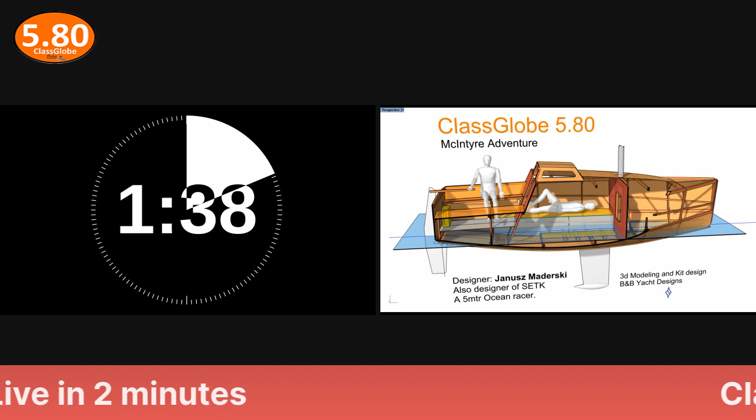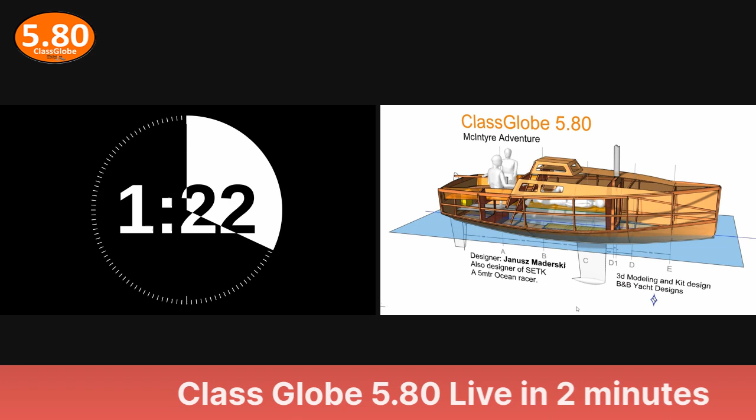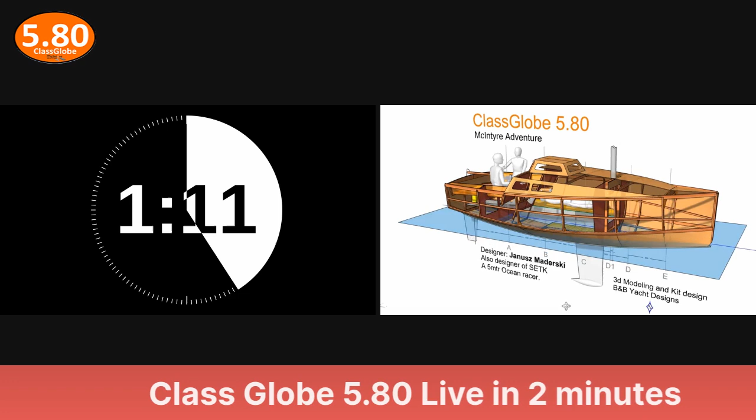This is Alan Stewart with B&B Yacht Designs, and I've got a sneak peek of a new 3D model. This is the Class Globe 580, designed by Janusz Maderski for Don McIntyre, who's putting together a new class called the Class Globe 580. And we are excited to be working on this project with him.

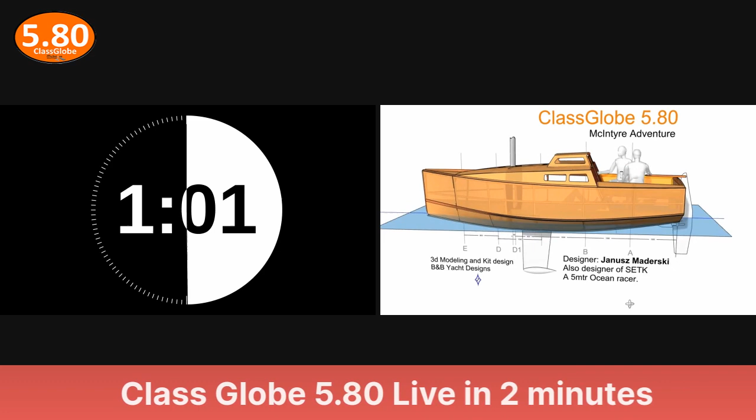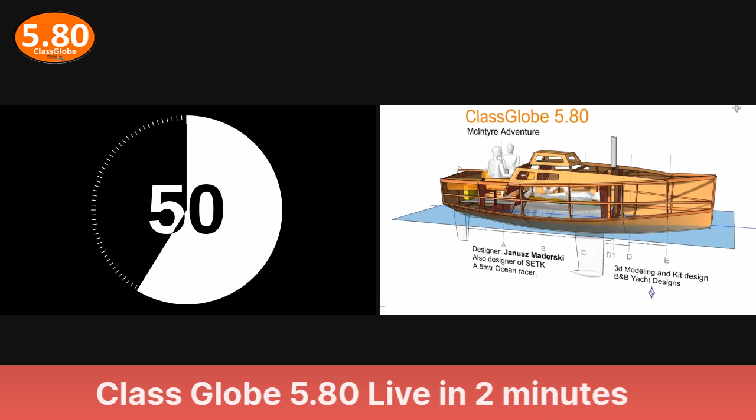This is the 3D model that we've been working on for the boat, and we're going to be putting together a kit for this boat. And more information is going to be available on their website, classglobe580.com, where you can see where to purchase the kit and you can read more about this boat. But we're really excited about the design and excited to be working on this project.

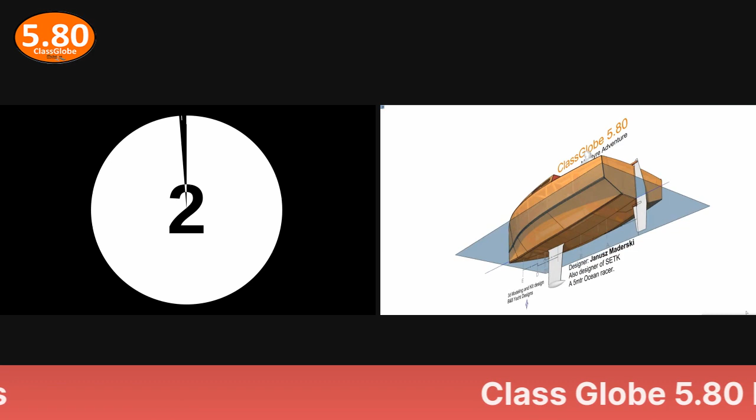Well, g'day everybody. It's been a while since we've had an update, and I'm in Les Sables d'Olonne at the moment with the Vendée Globe happening just out the door there, and Jane is on the side in Adelaide, South Australia. I've got Aida here as well, helping me back up in case I lose the internet.

And Jane's laughing like crazy. She just sent me a message. Just as we're about to go to air, I used the wrong logo. So we definitely are Class Globe 580, not Class Mini, which I put up there.

So anyway, this is going to be a bit of a monologue, me talking for however long it takes. We're going to go through a lot of things, things about the boats, about the events, and about the way we're managing some of the stuff, and so on. So yeah, sit back and have a listen to this.

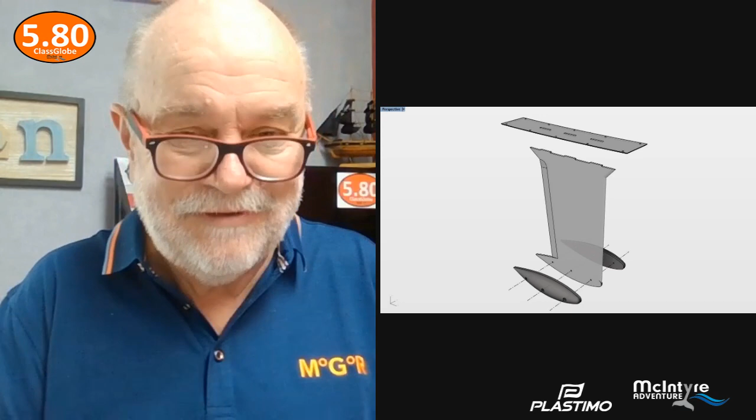There it is. Okay. When you buy your stainless steel pack, which is a rudder, gudgeons, pintles, all that stuff, you get the file to cut the steel plate into the format where you have tabs going up into the base plate, and then you have the lead bulb. Our keel in Poland looks like it's not running as fast as we thought. It's still not manufactured. I was trying to get an update from Piotr, but he's flat stick doing Trekka for us. And basically what we know is that the weight of the cut plate is correct, and we're yet to cast the bulbs.

We're suggesting and advising strongly that everyone that's doing a bulb, don't cast it yet. You can make the plug if you want to, because we made the same plug for ours, but it'll probably be heavier. The bulb will be heavier than what's designed, and we want to sail Trekka with a heavier bulb just where we start, because it's very easy to shave the lead off the back. So I'll let you know what's happening there. But yeah, you can go ahead and build your keel, but don't do your bulbs yet. Just remember that. That's very, very important for now. Now, the stainless steel pack, I'll just drop a couple of these in. All right. They're all under manufacture now.

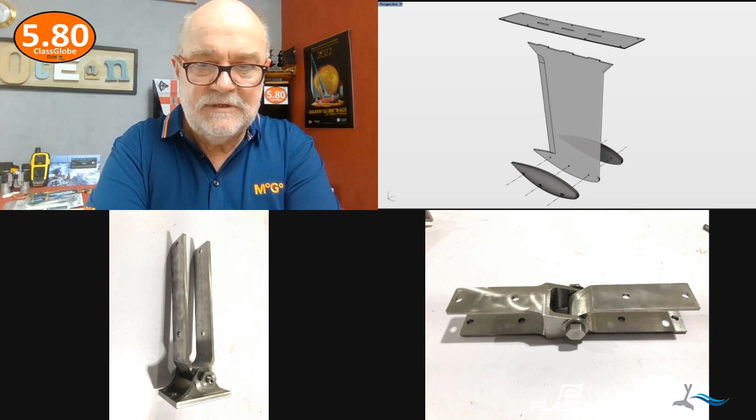We're doing the first 50 sets. Some people didn't take on those sets. They're all set there, ready to go, but those that have got them, we're scheduling to have them finished at the end of this month, and we haven't been advised of any other issues, so it should be on track. Then we'll get them out. Okay. So stand by for that. That's pretty straightforward. They're going quite well.

When we do get them, those that have ordered them now will be getting one of these. In fact, you'll get two. We've done the numbers, and you'll actually get two Globe 580 hats, with Mini Globe Race on the back and all the rest of it. So when you get your pack, look out for a surprise. There'll be two hats in each one of the kits, because the freight is really heavy, so we can easily put light stuff in, and we thought those that bought now get some hats as well. So there's nothing more I need to tell you on that.

One thing we thought: the bolt that goes through the gudgeons and pintles that you can see here is specially manufactured. It's not an off-the-shelf bolt. It's actually turned down to fit in and pivot. And someone may want to carry a spare bolt. I don't know. Will I carry a spare bolt? Probably not. If I was doing the Mini Globe Race, I may, but we'll see. That's about the only thing there. So I'll get rid of those now. That's all going pretty well. Come across to the next one.

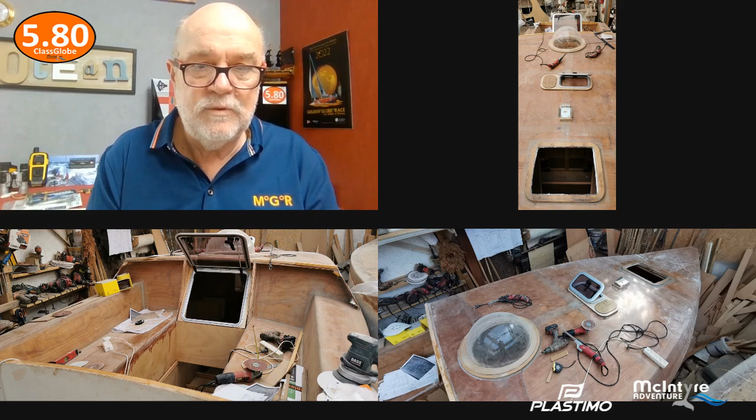If I knock in some of these, this is all about the Plastimo Builders Pack. Pitor's frantically about to start fitting all our Plastimo stuff. Trekker's currently white with 4 layers of beautiful white, and another 580 builder went and saw it and was completely gobsmacked when he saw the boat. He's a lucky guy. I haven't even seen the boat, but the camera's wide-angle lenses distort the boat, and you can't sit back and see it.

Anyway, this guy went to see him. He talked to me about wanting to build a boat, and he just signed a deal with Pitor to build the next one after Trekker. So apparently it looks really hot. So we're waiting with bated breath on that to see more.

So the Plastimo Builders Pack, I keep saying this, it's only a few weeks away, and it is. It's still only a few weeks away, but we'll try and get it sorted as quick as we can. And it's going to be possibly very relevant for everyone in Europe and the EU because it's easy to ship. I'm not sure how it's going to work yet. We're trying to sort out what happens in other parts of the world because Plastimo has agents in other parts of the world, but the pricing will change and a few other things. But anyone in Europe is looking pretty good.

So, okay, I'll get rid of those, and get rid of those. Let's see, I think we're just about ready to answer questions. One of the questions I got, and I'll put this here. In fact, I'll come through to Facebook now and I'll read the questions here if I'm lucky. Oh, I just lost it. Okay. Ada, can you find me the 580 on this for me? Thanks. Just that post again.